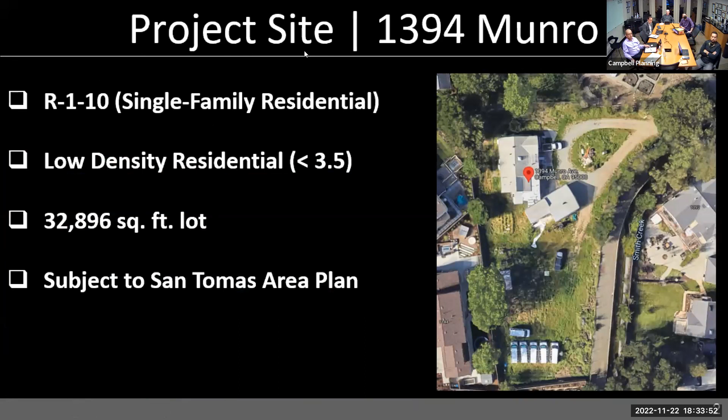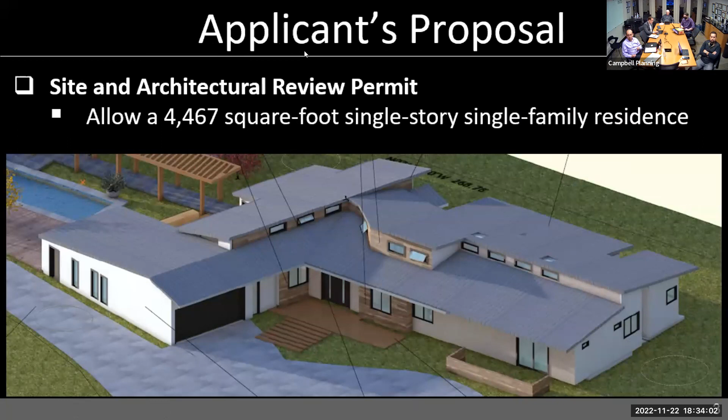So this particular project site is an R-1-10 zone property located in our San Tomas area neighborhood. It's one of our larger lots, 32,000 square feet, and has a low density residential land use designation. So the applicant's proposal is to allow a 4,467 square foot single story, single family residence. And in consideration of the item, staff had pulled out 2 areas for consideration.

The first being compatibility, recognizing this building's a little bit more contemporary in style, and it also has a clerestory roof, which includes somewhat complex shapes. But in the report, we identified how it mimics elements such as gable and hip roof styles. Then second was the commentary on scale and mass. The San Tomas area neighborhood plan discourages the use of design elements that accent height, which this building, being a 1-story building, obviously accomplishes.

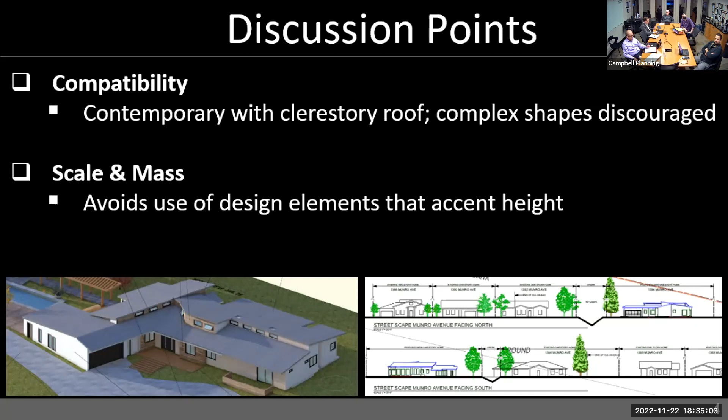One other thing I'll mention on this building, it's located more than 150 feet away from the public right of way, so it's kind of like an interior lot. It's deep enough in the lot that it's not highly visible, and it's at the end of a cul-de-sac. So with that, staff is finding, has no other comments. Staff is supportive of the item as presented, and we'll turn it back to the commission for comment.

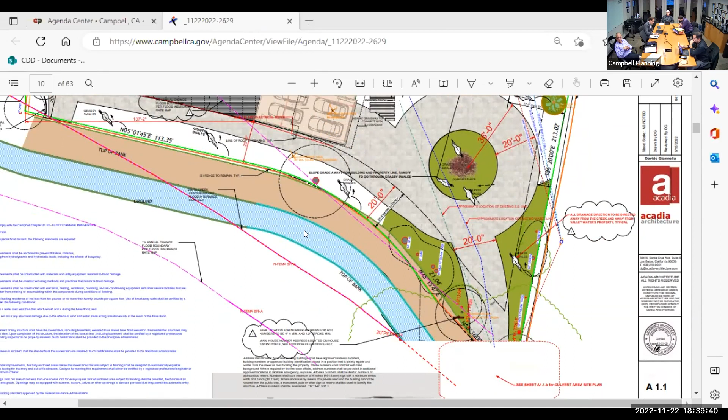Let me pull up that discussion point here on the screen. Sorry, it took me a minute. So the comment is that this edge here, although they both intersect at that tight pinch point, you have what we're calling the front and what this other interior side, or the other front, being treated as the front. The material impact of measuring this side as the front is they would need to meet a minimum 25-foot setback where only 20 feet has been provided—that would result in an additional 5 feet cutting into this 4-car garage, which would need to be amended and pushed back to meet the 25-foot distance.

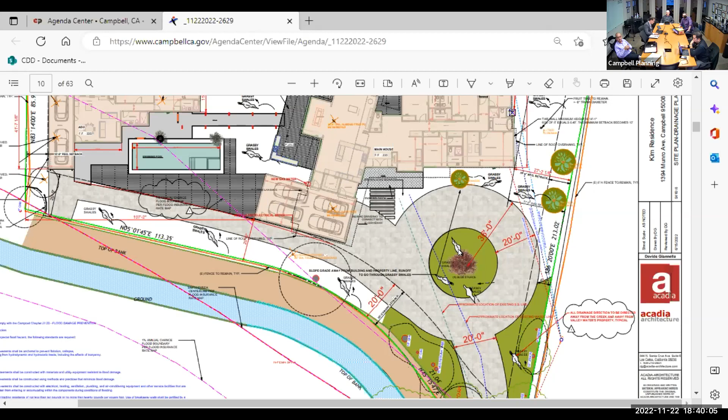If you're looking at the typical frontage measured this way, it's a very long, odd lot that doesn't actually have direct frontage into the public right of way. This area here, if you take 20 feet back, shares that full driveway apron coming into the front of the property. So we did look at it both ways, and that's why the comment was raised in the report—but because of the unique site layout, and because we don't have a clear...

Well, maybe it's standard - whatever the water district or that entity has as their portion between the property and the street. There's a lot of space because of the creek, and the space that the water district has. So it's kind of a technicality, just so that they have that lesser space there to the garage.

That whole area is on the south end of the property. I would offer two things: first, it's a requirement for the site configuration as presented, and second, there's a lack of a clear objective standard that we could impose any requirement to the contrary.

Right, I don't have any problem with it. It's a big piece of property and a big home. I like the look of it, I don't have any problems with the style. So that was really the only question I had, other than one I think got answered later - the information about the portion that's on the bridge.

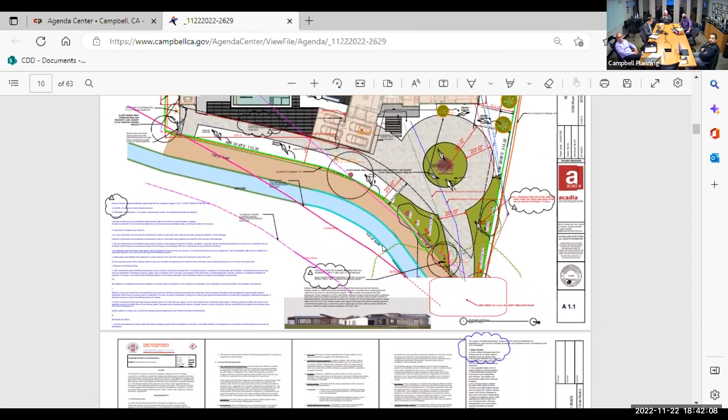The access with the bridge is going to widen, and then there's a portion right by Munro Court where those sections are - I don't know if there's going to be an improvement there where they've got some area right by the curb.

I would offer that the way we structure this report, the work with the bridge is outside of the scope of review, because these improvements occur outside - again, this is a different property, a distinct property. So the focus of the site and architectural review permit is on the home and the architecture of the site this property is on.

Those sections between the curb and the culvert - those two green areas, one for the property on the right, one for the other - those green areas are not part of the property. Who owns that? Does somebody own that?

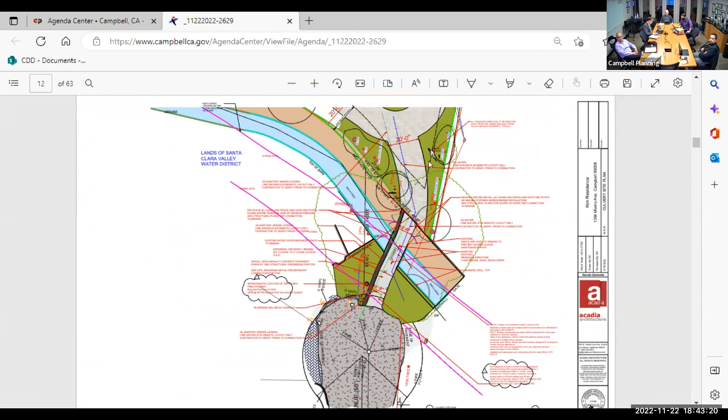I believe there are actually three distinct property owners in play. Those are tiny little segments. You have a segment of the adjoining property to the southeast, whose property extends in front of the subject property. You also have the water district property, which runs for a portion of this culverted creek.

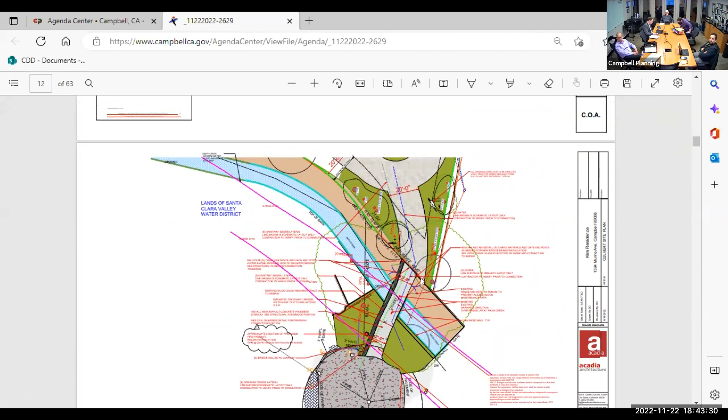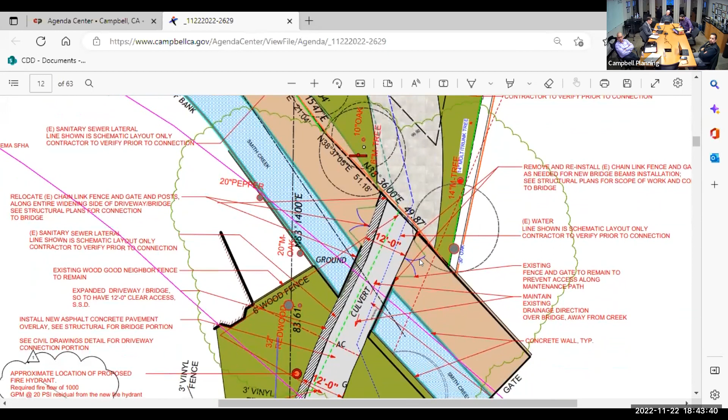And then at the back of the culvert, beyond the Santa Clara Valley Water District property, does this property then begin? This is the front property here. So although they are depicting and showing all these improvements proposed in this area, this is going to be reviewed under a separate permit.

Hats off to them for figuring out how to make all this work. Would the applicant like to speak? Is that David? Apologize if I'm not pronouncing that correctly.

Hello, hi, Commission. My name is Davide, actually. David. Yes, hi.

Because I only received the comments today about the possible switching of the setbacks, I didn't have much time to review that in detail. I understand there could be some impacts, and listening to your discussion, I'm hoping to have a conversation with Stephen or get more clarification as to whether we need to squeeze the garage by 5 feet, because there will be some changes to the design in that case. I'm not so worried about the ADU adjustments, but for the main house it could be a little challenging. Any clarification on what counts as front and side setbacks, or any lenient approach we could take - since, as everybody mentioned, the house is tucked in the back and nobody will even see it from any side - would be helpful. But of course, we will abide by any decision you make.

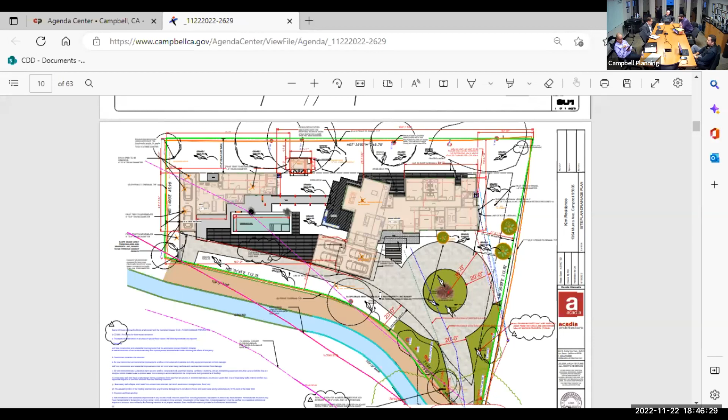Seeing none, the only comment I had was I did not know we had lots this huge in Campbell. It's truly titanic. I'm amazed you can have a house that big and still have a 0.16 FAR. It's a single-story house with a lot of space around it, and doesn't have any weird modern elements. I have no complaints. This seems like exactly the sort of thing you'd put on a lot like this. Presumably whoever lives here really likes their space.

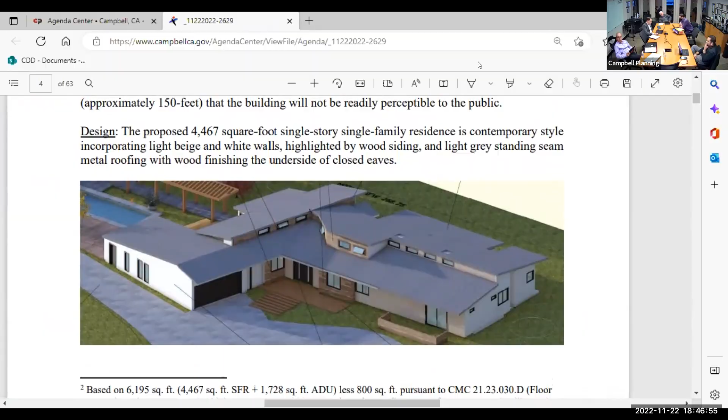I'll just repeat, I'm fine with it. I was surprised to see this too. I've been to a lot of places in Campbell, and I used to live in the South San Tomas area, but this is one of those places that used to be county land, doesn't have sidewalks, and there's a lot of odd large lots. This has got to be one of the bigger ones, if not the biggest, and I didn't even know it existed. I didn't live very far from there at one point, so I'd never been down Munro, so it was kind of interesting to see.

The only other question I have, just for my edification, is regarding the ADU. It's a nice design with the ADU next to it, with a 2-car garage and a lot of square footage. I'd probably answer this myself, but I just want to get comfortable. It's defined as an ADU because it's one parcel with a second structure, right, as opposed to a whole other house? To be a whole other house it would have to be a separate parcel. That's the way we kind of define things, right?

Not under SB 9. SB 9 would allow you to have 2 single-family homes, or you could even have a duplex on a single-family lot, but also general plan consistency with zoning. Right, by that, prior to SB 9, I guess I was thinking of... but even with SB 9, so we don't...

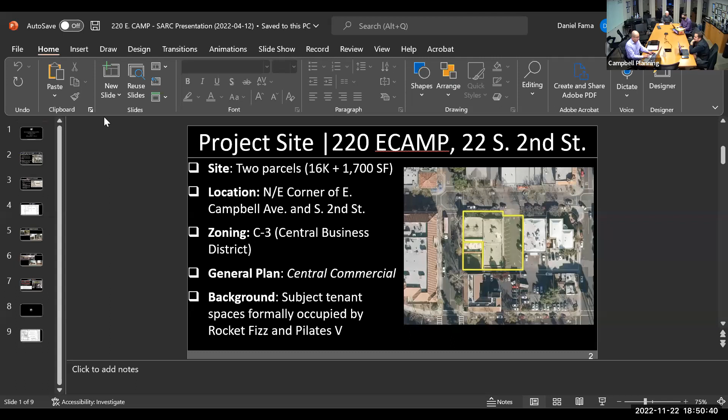Okay, so this item number 2 is a site architectural review, well, a conditional use permit with site architectural review, for property located at 220 East Campbell and 22 South Second Street. The project site is technically 2 parcels — one primary parcel, approximately 16,000 square feet in size, and a smaller secondary parcel of approximately 1,700 square feet, as shown in the map here.

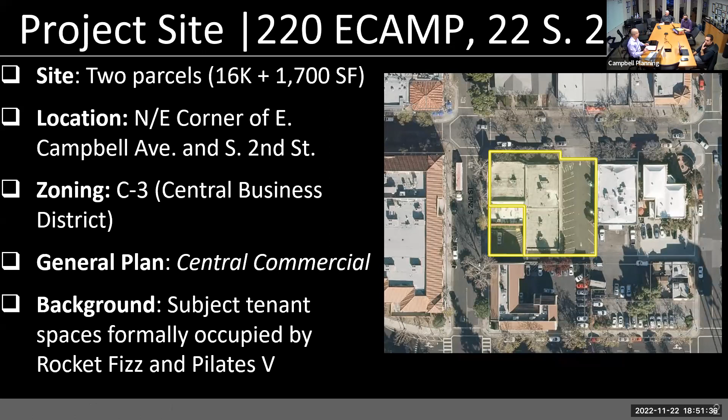The zoning district for this property is C3, the city's downtown central business district zoning district. The general plan designation that corresponds with that is central commercial. Just for quick background, the subject tenant spaces that are part of this application were formerly occupied by the old Rocket Fizz candy store and the Pilates studio.

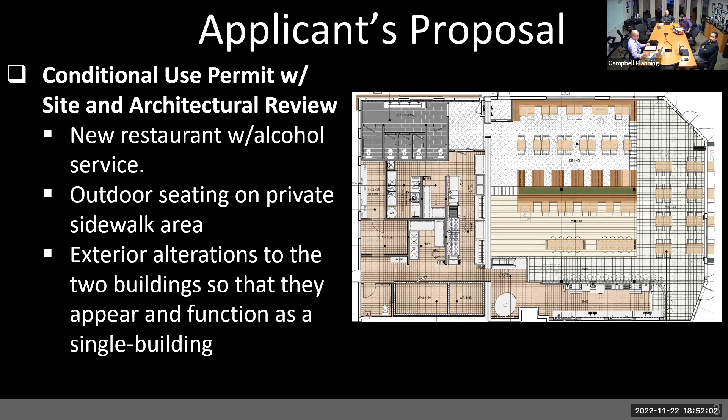So that application for the conditional use permit and site architectural review would allow for the new restaurant with alcohol service, outdoor seating on the private sidewalk area, and exterior alterations to the 2 buildings to make them appear as one building and function as a single building, even though they span 2 properties — and that would be executed through a legal agreement recorded on the 2 properties.

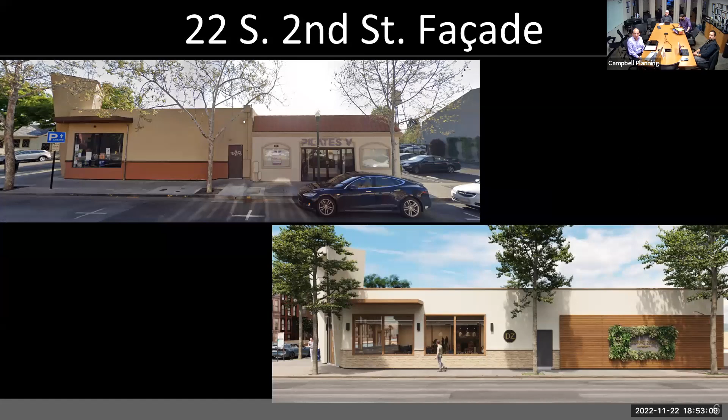A little different, however, in terms of the 22 South Second Street facade. The integration building is perfectly acceptable; there's nothing inconsistent with our policies. However, this plan does effectively show the walling off of this existing storefront with new wood paneling. The proposed floor plan shows the bathrooms against this wall, which results in the loss of that transparent storefront.

As noted in the staff report, both the C3 standards as well as the downtown development plan and general plan speak to maintaining open windows and displays to provide visual interest. So staff's recommendation to the SARC is to recommend to the Planning Commission a revision to the floor plan that would allow the Pilates V storefront to remain transparent to provide some vitality to the street.

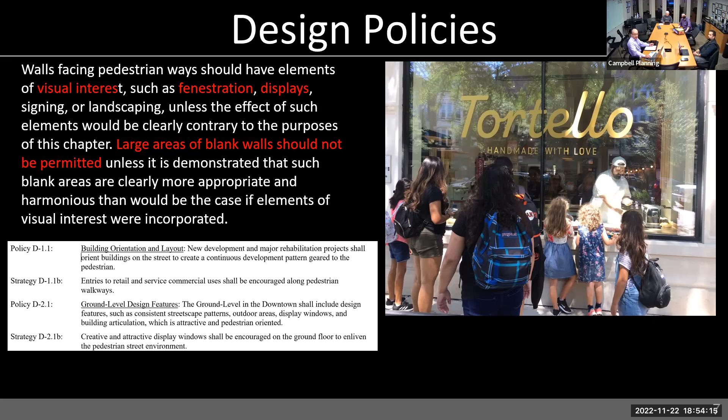For example, this is a restaurant in Chicago that has their pasta making section visible to the street, which provides a level of visual interest. Obviously that would require some reconfiguration of the floor plan, but this is a brand new restaurant, and what now is going to be an empty shell. That concludes my presentation.

Thank you. Any questions for staff? Yeah, I had— I'll leave my comments for aside later, but can I comment now? Let's do questions first. Okay, let's just do questions.

So there was something you didn't really cover, in terms of not recommending sidewalk seating, right? You didn't go over that, but it's in the report, right? And I actually kind of take issue with that. I don't think it would work based on what their concept looks like, because it's too far out.

But if you compare that section of sidewalk going east, and you look at the Tercero and El Guapo's, they both have outdoor seating that extends some distance out because that's an extra wide sidewalk there. So if you look at that block and the other two restaurants on that block, they extend their seating out to—there's about a 5 foot clearance from the tree line area, so there is room. There isn't as much room as what they're showing on there, I don't believe, but there is room to put at least a single line of tables, similar to say Flights.

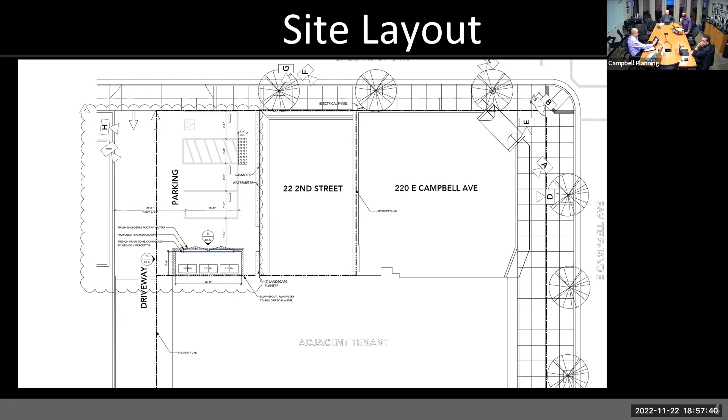So it's already been challenged to a large degree—this speaks to a broader issue. The city probably needs to relook at its dining requirements for sidewalk seating. We've had a lot of pinch points throughout the whole downtown that have caused accessibility issues. Is this ADA compliant? You have a barrier right down—is this ADA compliant if you have a barrier down, the thick line being the public-private line? Correct. It's so narrow, that's why. Yeah, so you have like one square between where the barrier would be and the tree, and I'm guessing that you can't.

Yeah, I mean, I'm not absolutely convinced. That rendition there would be too wide. Well, this rendition is also not quite right, this is a slightly older version.

That barrier, the planter, is actually going to be pushed in further so that all the sidewalk seating is on private property. So are you saying they could do it as long as they keep it within that area? Yes, which they have, which they are currently showing in their current plans, is just tucked in a bit more. It maintains the public sidewalk area a bit more.

Like I said, if you look down the line, there is a break point all the way down that block. The front of that building comes out a little bit more than the other buildings, about a foot or something. So they have about a foot less to work with than the other ones, but there's still a fair amount for outdoor dining. Just the question of whether they'd be able to put in a big barrier like that and still have people walk around, because that configuration wouldn't give you clearance on the sidewalk.

I have a question. Am I allowed to talk or comment at this point or not? It's not terribly formal if you're signed in. Yes, go right ahead.

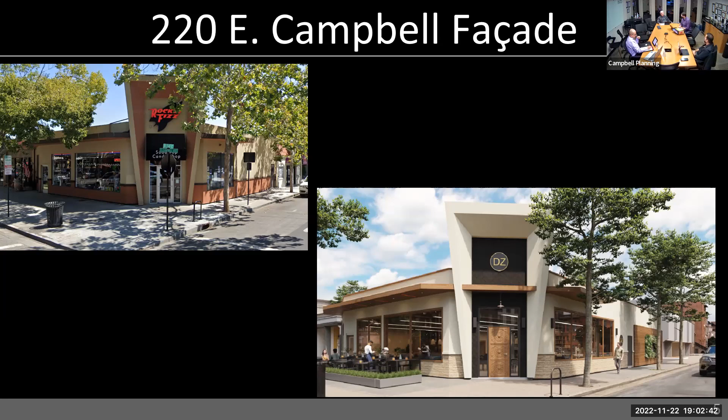So the thing about the side, my take is I kind of agree with the staff's recommendation. This would be kind of unprecedented because of having a blank wall. I don't think there's any examples of that in downtown. So the question is whether or not you can reconfigure.

There's 2 issues with that. One is we have function and form, right? So right now what we're doing is trying to find a middle ground between function and form, but this goes beyond that. Now it's feasibility, because these are 2 separate buildings, and we're just merging them on paper. So you still have 2 separate meters, 2 separate gas lines, 2 separate everything.

So if we try to reduce the back of the house, like the kitchen and all of that, and if we don't take all of that area—we wanted to actually take more area and go into 220 Campbell, but because that's kind of pushing it, that's why we have the bar outside. So what we did is we separated what we could separate: the bar, because it basically operates by itself, and the pizza oven, because it doesn't join the HVAC system or hood system with the rest of the equipment.

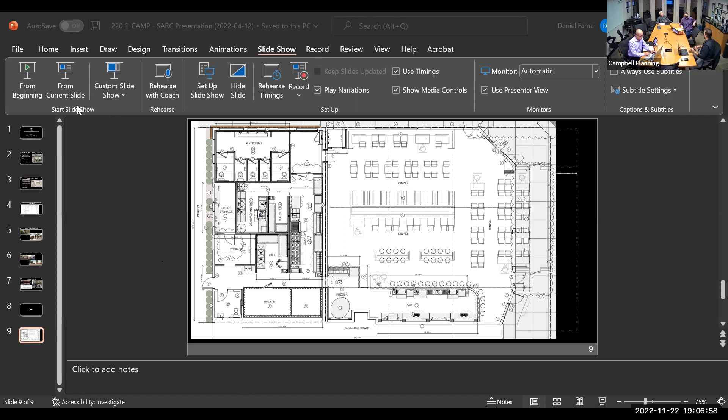Now, if this was a shopping center where everything is glass, and when we do restaurants in shopping centers on corners, then we're forced to do that. You'll remember every time you go to a restaurant in a shopping center that has fenestration on both sides.

On both sides, you'll remember one sideways becomes a hallway to get into the restaurant, because the restaurant needs to be pushed against the kitchen or the back of the house. Because if not, it becomes really expensive and it's not ideal to run water pipes and sewer lines everywhere.

So to sum up the front of house, you have the diners close to the windows, and the bar and utilities on this side. And on the back of the house, you have the kitchen stuff sort of on this side, to match up with that.

Also, following design guidelines from downtown, it does encourage the use of vegetation or landscaping. We have that as a live wall, so we're not leaving a blank wall, which is what the guidelines don't want you to do. So we're doing that planning along with the interior design at the same time. We're using 3 of the 4 elements that are encouraged.

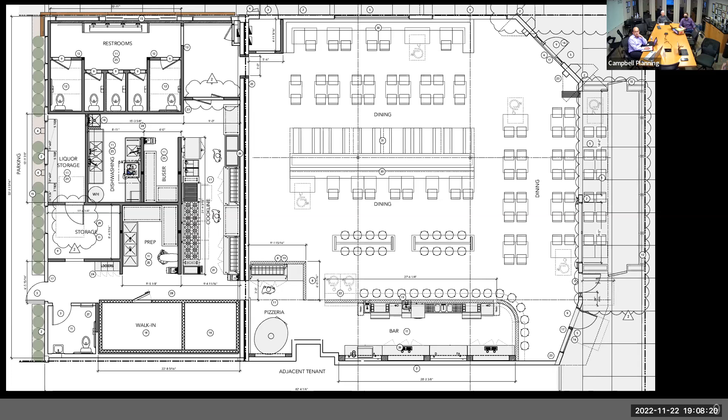Signage, landscaping, and some architectural elements. So is there going to be signage on the side? Yeah, if you can show the rendering, it's part of the landscape, like we have. It's together with this, right? It's like a live wall with design on it, kind of like an Italian way to make it look more.

Also, the other issue is it's substantially more expensive. I know the type of restaurants Dana is referring to. I love them, they're beautiful, having them open to the public so everybody can see. It's not the prettiest thing when these kinds of restaurants are very busy - the kitchen gets super frantic because the food is so good, it's always busy.

Monday, the Mountain View restaurant in downtown had 200 reservations on a Monday - it's crazy, the kitchen gets crazy. And when you want to expose your kitchen like that, which we don't really have the budget for because of all the improvements we already have to do to this building, we'll have to tile the walls instead of just putting FRP, or do stainless steel.

It's more money. I did a little table analysis of fenestration, and we're losing not even 10% of fenestration - it's very minimal because we're adding that big window over there. So we're not just taking some of that facade, which isn't very attractive anyway. We're adding another big window there into the dining area so you can see the bar, the ambient atmosphere.